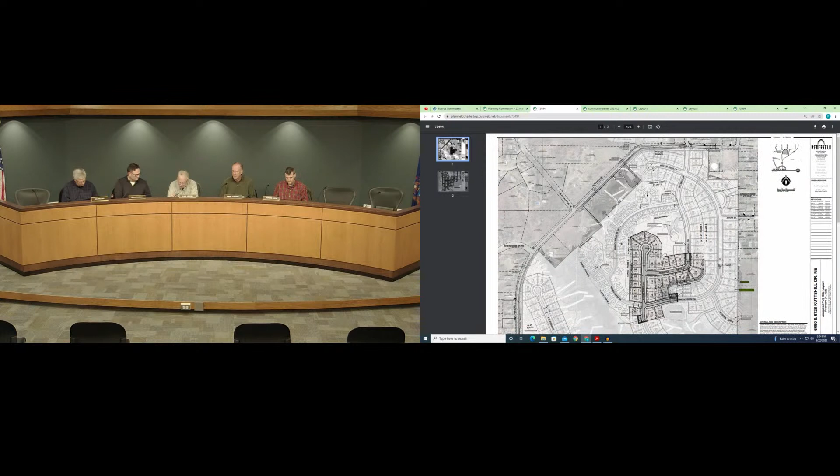Project name: the Ravines at Inwood, Phase 4 PUD, Phase 3 plat. Applicant Jeff Clausen on behalf of Kuttshill Development LLC. Project address 6500 Kuttshill Drive Northeast. Permanent parcel number 41 10 14 276 003. Size of site, entire PUD 93 acres, Plat Phase 3 is 13 acres. Zoning: PUD, planned unit development. Description and action requested of the Planning Commission: to hold a public hearing and consider a recommendation to the Township Board for tentative preliminary plat approval for the Ravines at Inwood PUD Phase 4, Plat Phase 3.

All right, is the applicant here? If you would come forward to the podium, give us your name and the details on the project, please. I'm Rob Behrens with Nederveld, and I'm here with Jeff Clausen on behalf of Kuttshill Development. We're here tonight seeking tentative preliminary plat approval for Inwood Ravines Phase 3. It's the fourth plat within the development.

As you can see, Phases 1 and 2 of the plat - we developed this as Phase 3 of the plat, but because there's a separation between this development and that plat line, they're not adjacent or contiguous. We had to rename this; it's called Inwood, the Ravines at Inwood South. So it is the third phase, but it's not contiguous to Phases 1 and 2 of the Ravines at Inwood. It's a technicality based on the Plat Act, but this is the fourth phase, which is important for a later comment.

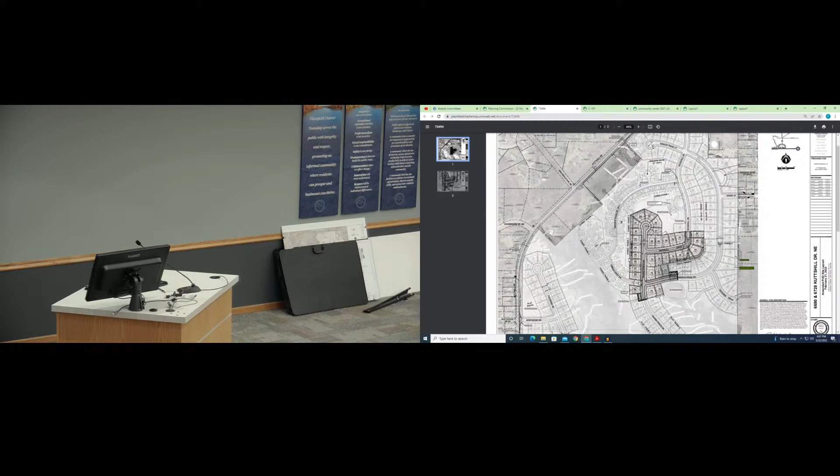So we fulfilled that obligation. The PUD also required that, contiguous with Phase 4 of the plat, we would build the pavilion area. That is located here — that is the plan, that is what has been proposed, and we can flip to that at the end; there's a rendering of the pavilion and the amenities and playground and things, so we are planning on doing that.

The third thing required is southbound Kuttshill at Rogue River, some right turn improvements. We were prepared to do that and did some topo work. Evidently there have been some discussions between the road commission and the township, and maybe even MDOT or soon to be MDOT, about how to make that intersection work better than it does. So we did an estimate, and the township engineer reviewed it.

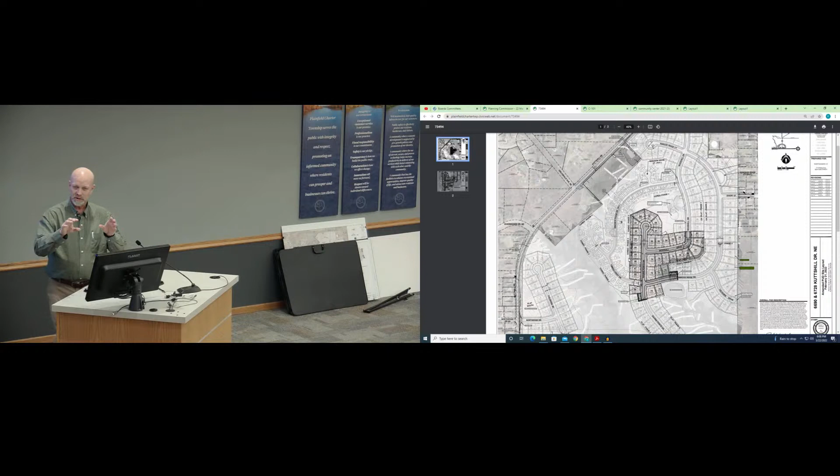Pete and his group reviewed it, and the road commission reviewed it. We agreed on a number, including 25% for engineering and contingencies, and the developers have agreed to write that check to the road commission to be held in escrow. They're going to use that when they come up with a design, along with some public funds, to redo it and take on that construction. But we agreed to take our funds and deposit them to be used for a bit bigger, better, more thorough project than just the right turn headed to the south. So that's it in a nutshell. Jeff and I are here to answer any questions you may have.

I think we'll start with staff comments first. Elizabeth, is this you? Yeah, this is me, and Pete has been working on this too. I think the applicant did a great job of giving an overview.

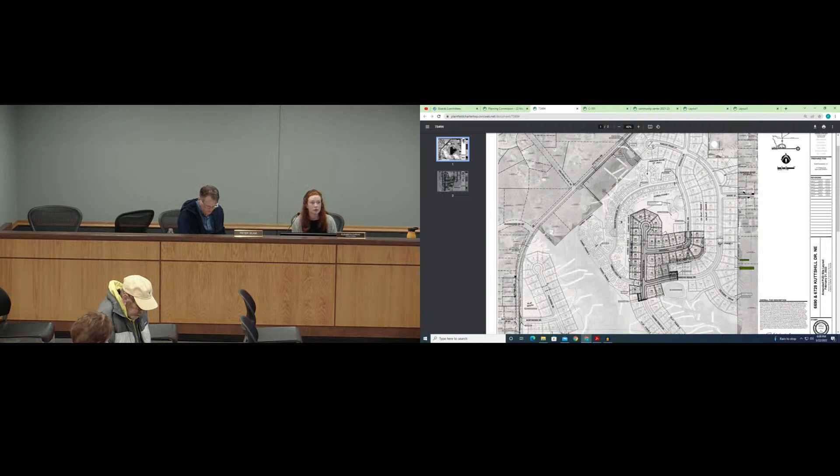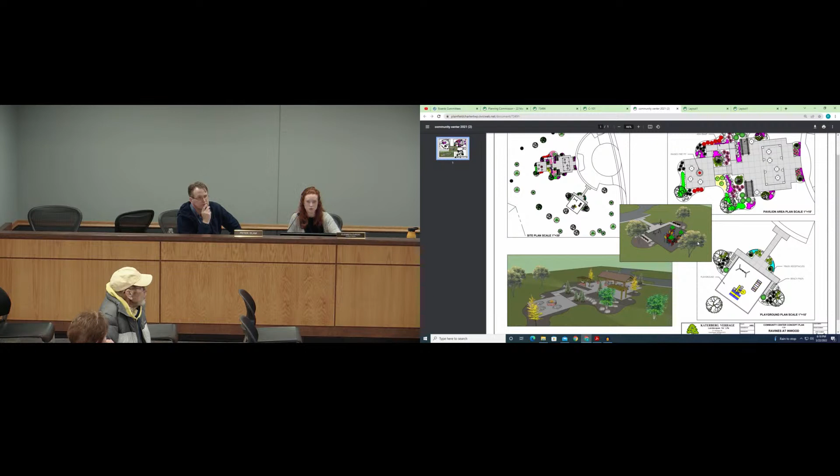This is technically the PUD's fourth phase, which does trigger all of these improvements that need to be made. Here's the community center renderings the applicant was referring to. They are required to do this as part of this plat. We've worked out sidewalks and all of the infrastructure that needs to go in. The proposed lots do meet the requirements of the PUD, which is the purpose of the tentative preliminary plat, to make sure the lots they're proposing meet either the zoning ordinance or the PUD regulations, which these do. The amount in escrow for those intersection improvements was approved by the road commission and staff, so we're comfortable recommending preliminary plat approval at this time.

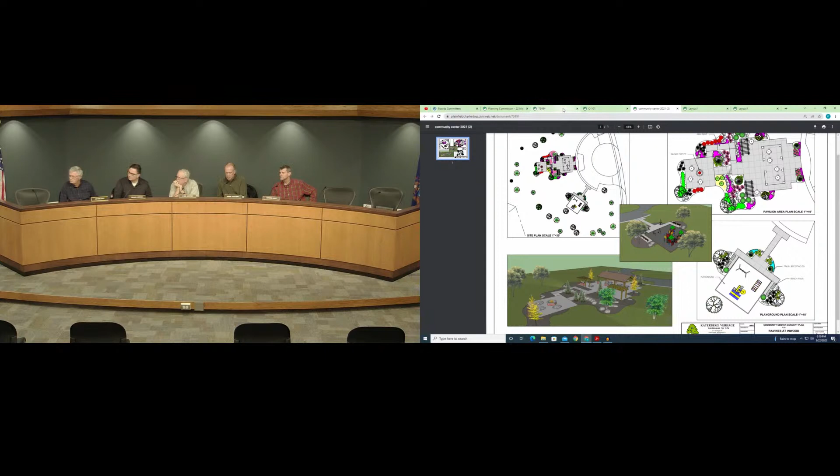Pete, do you want to add anything? Just a little background: the road commission is looking at an alternative Michigan-type turnaround down at that intersection. They're investigating what will and won't work right now. We wouldn't expect that to happen this year, but perhaps next year if it does. So this is a little more background on that part of it.

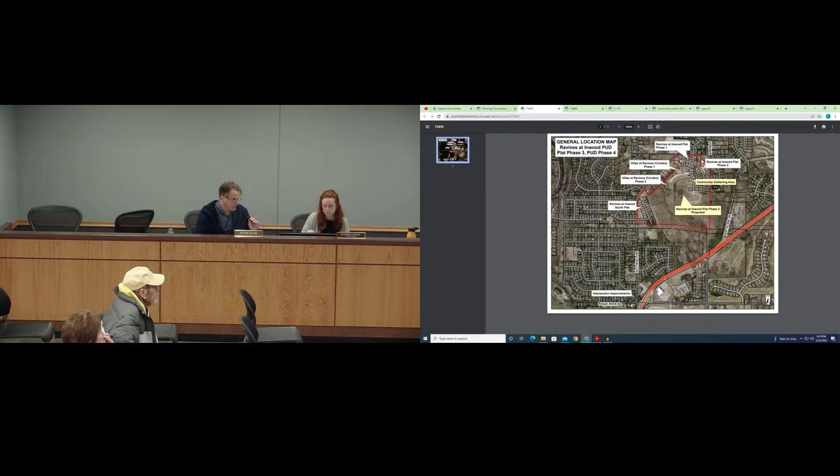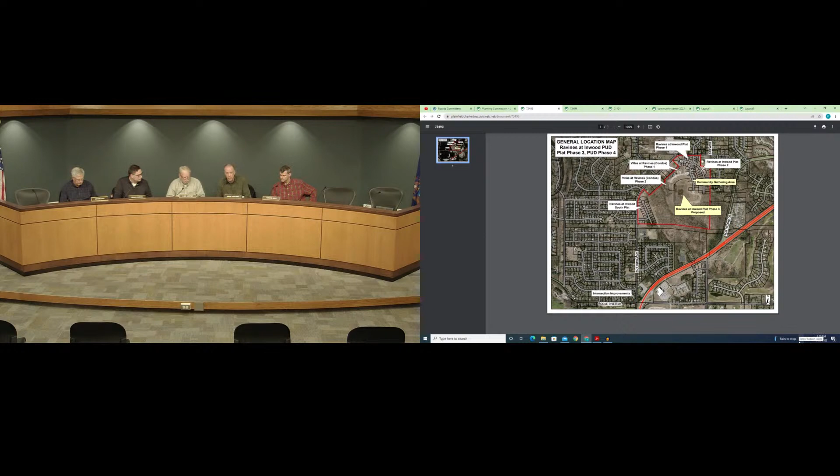Staff-wise? Okay, we'll open this agenda item up for public comment. If there's anybody wishing to make comment, raise your hand and we'll invite you up to the podium. Sir, if you'd like to come up to the podium, state your name and address first.

I can't remember the address. My name is William Sneller, I'm president of the Council of Plainfield Christian Reformed Church. I think the address is 6350 Kuttshill Drive. We're the church property adjoining. My only question is, you pointed out there's a retention pond — where does the water go from that retention pond? It goes south to M37, in front of... what's that gentleman's name? And then there's a church there.

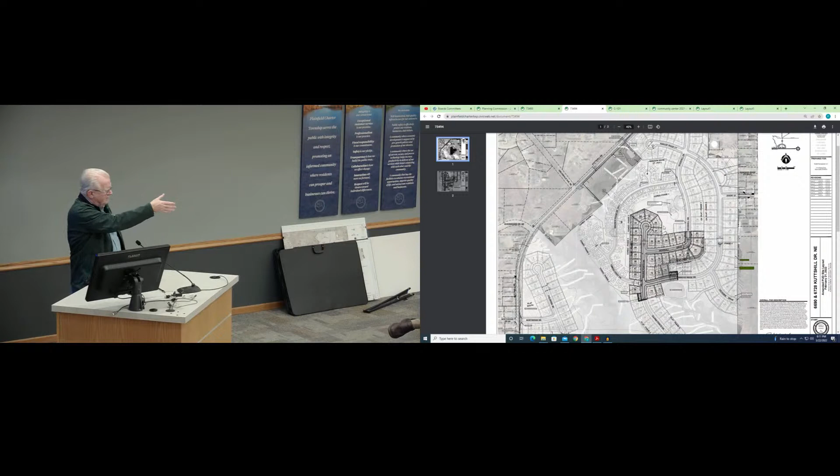So that water doesn't go toward Northland Drive? No, correct, it goes to Northland Drive, comes out by the old Victory Baptist Church. All right, I just wanted to make sure it wasn't complicating anything more than what we're already having going on with water.

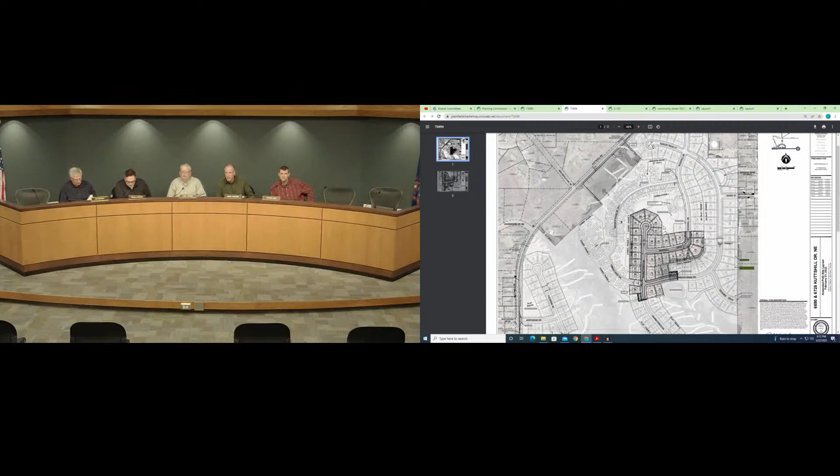Any additional public comment? Anybody else wishing to make a statement? Raise your hand. Seeing nobody, I will close the public comment portion, and we'll see what questions the commissioners have.

Jim, we'll start down on your end. I have nothing here, thank you. Dennis? I have nothing at this time, no. Carl? No, I have no comments. Peter and Elizabeth covered the questions. My question was, do we have any time frame that the road commission has for the improvements on Kuttshill? And the answer is nope. So it sounds like next year. So I'm all set. Thank you, Brian.

Okay, my only question is the cost of the road — that preliminary amount being put in escrow — what if that's way off by the time they get around to doing this, or something drastically different has to be done? Well, the amount of money they're contributing is only a percentage of what will have to be spent. But if it does come in higher, they're done — it's going to be a commitment by the township and the road commission to make these improvements. Essentially, with the money we're getting from, I guess it's Biden bucks, I can't remember the exact term, that's one of the anticipated projects we might be able to make happen now.

So that's not a concern with budgetary. Well, it certainly is, but the fallback is if all else fails and the road commission design isn't going to happen, then we can come back and still put the right turn lane in there, which this covers. Okay, and that's what that money is held in.

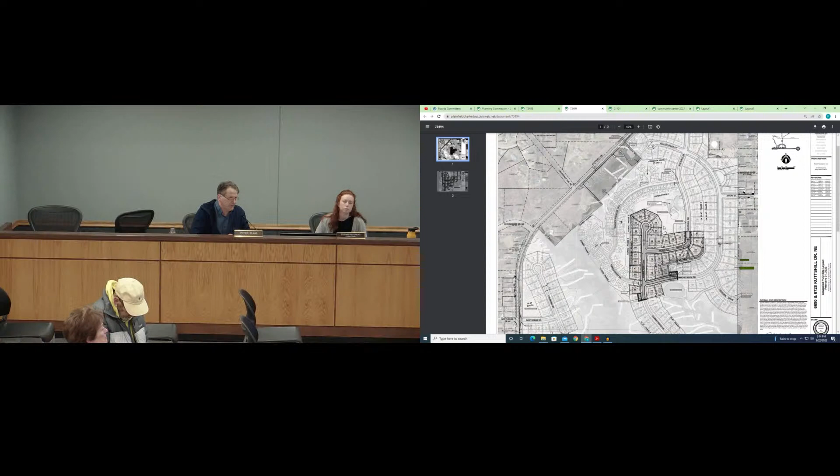Hoping to find a better solution, maybe? The right turn lane is a nice thing, but ultimately does not solve the problem there. The problem is left turns onto Wolverine Boulevard and Rogue River there.

I think that's all the questions I have. If everybody is good, I'll take a motion at this time. If somebody would like to, I'll make the motion.

I move to recommend tentative preliminary plat approval to the Township Board for Ravines at Inwood Plat Phase 3, PUD Phase 4, for 32 platted lots, subject to the following conditions of approval. Number 1, the applicant shall complete the required amenities as outlined in the Ravines at Inwood PUD ordinance to amend, prior to build-out of the Ravines at Inwood Plat Phase 3, PUD Phase 4.

And 2, the applicant shall provide escrow funds to the Kent County Road Commission in the amount equal to the improvements required to the Kuttshill Drive/Rogue River Road intersection, as approved by the township engineer and the Kent County Road Commission. We have a second.

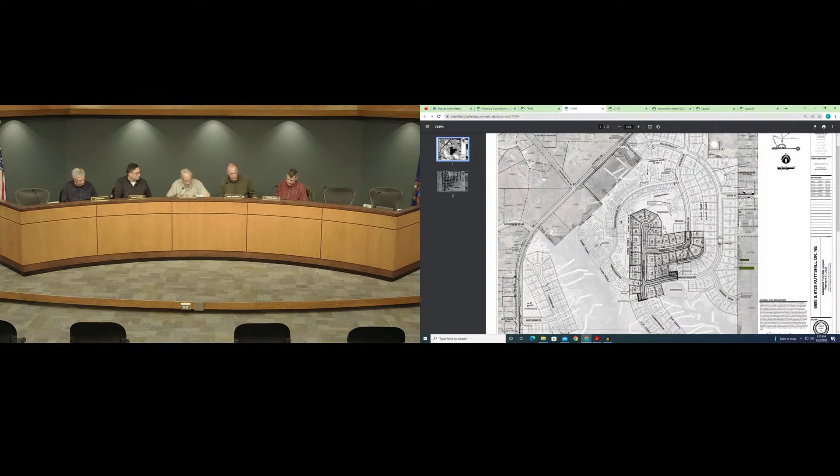Support. All those in favor, say aye. Aye. All those opposed, same sign. Passes. Thank you very much.

Our next agenda item is the Valley expansion. Carl, would you like to read that applicant information, please?

Project name, the Valley Rezone and PUD Expansion. I think I'm reading the right one, yes. Applicant, Zed Posak, on behalf of TEG Valley LLC. Project address, 4248 and 4325 Pine Forest Drive Northeast, 4209 and 4243 East Beltline Avenue, and 3110 5 Mile Road.

Permanent parcel number 41-10-34-226-045, 41-10-34-226-042, 41-10-34-226-046, 41-10-34-226-009, and 41-10-34-226-049. Size of site, entire PUD 34.09 acres, development area 0.51 acres, zoning PUD planned unit development.

Project description and action request: the Planning Commission to hold a public hearing to consider an amendment to expand the Valley planned unit development by rezoning approximately 0.51 acres at 4243 East Beltline Avenue and a small portion of 4248 Pine Forest Drive from O office to PUD, to demolish an existing home and allow for a 3,200 square foot 6-unit apartment building in the same location.

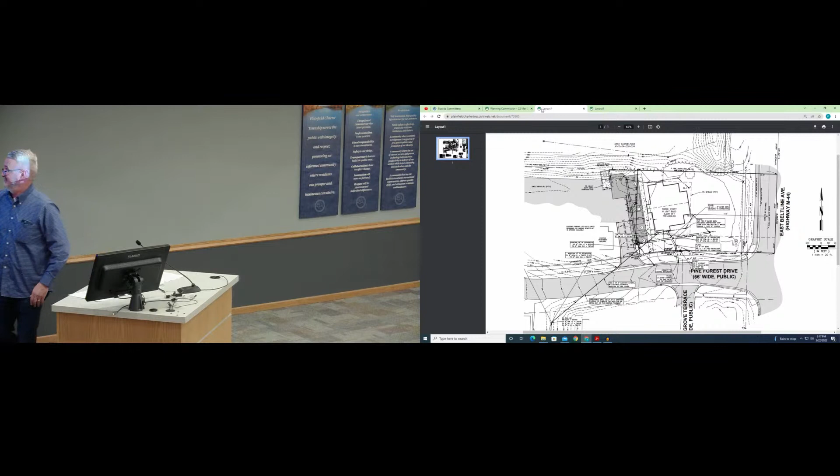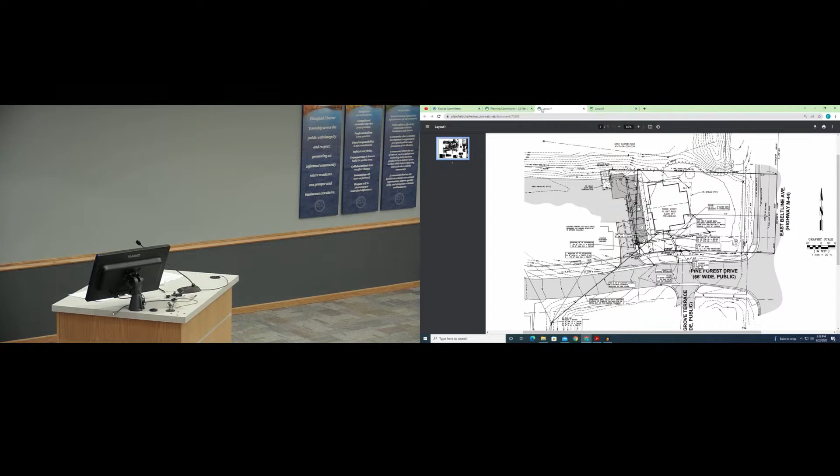Stormwater management's all being handled on site. It'll discharge to the existing storm sewer on Pine Forest Drive. Water and sewer utilities are all available adjacent to the site. That's about all I have. It's a fairly simple project. It's kind of wrapped up into the PUD amendment, which is a much larger project, but the actual proposal is fairly small area.

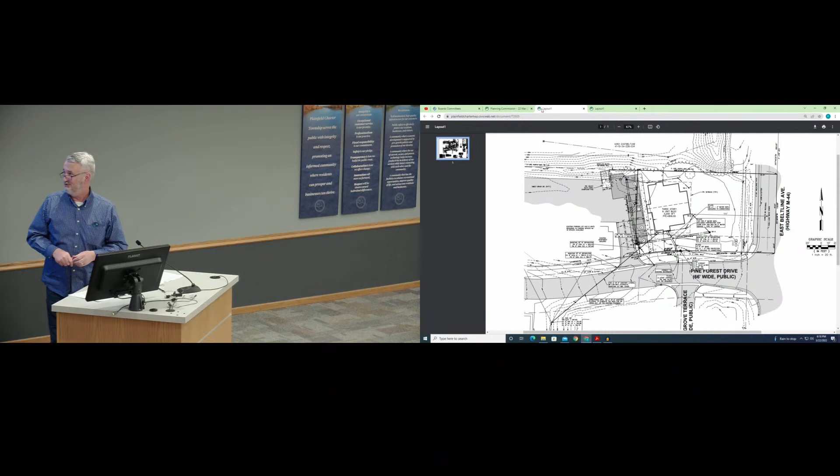Staff, is this Peter? Yep, is this you? Okay. So what you have, and I'll just go through a brief bit of the history first—they came in a couple years ago to rezone this existing single-family home into office, and a portion of their property that was part of the existing apartment complex. That project, that plan fell through, and then they were essentially a non-conforming house.

And they came back to see what they could do with the property, and we said, well, you can't reuse it as a house—you have the office option, or you can tear it down. Staff suggested they could pursue an office or apartment building utilizing some of the existing infrastructure there, but did urge them to be as far away from East Beltline Avenue as possible to meet the intent of the overlay district and generally meet the characteristics of the area.

Subsequently, as we reviewed the PUD, we noted it had not been completely updated, because when they came in for the improvements in 2017 for the overall development, we didn't have to go through the process we have now. So we're also expanding the PUD in a way, so we have to clean up all the language that's in the existing PUD.

So it's a twofold action: one, rezoning the property from office to PUD, potentially, as well as amending the PUD. We wrapped it all into one motion here for you, if you're willing to recommend it to the Township Board. There is one condition of approval. I do have most of the material, but staff-wise we are looking for a consolidated map of the entire PUD as it is today, so we can put it in our book as a reference.

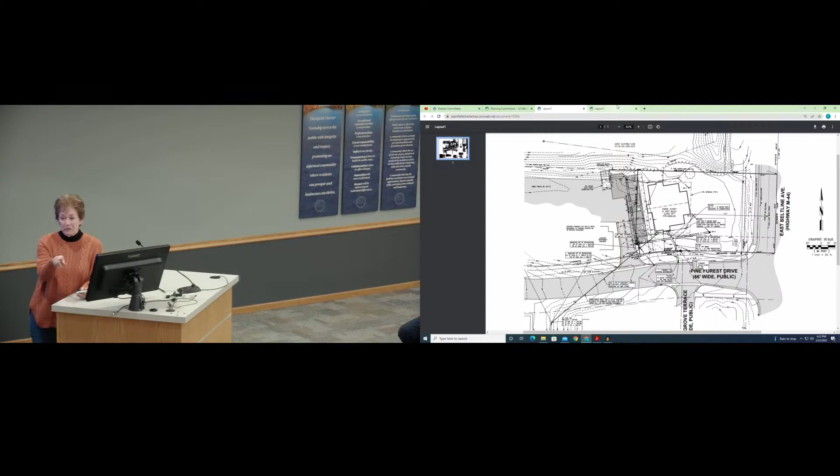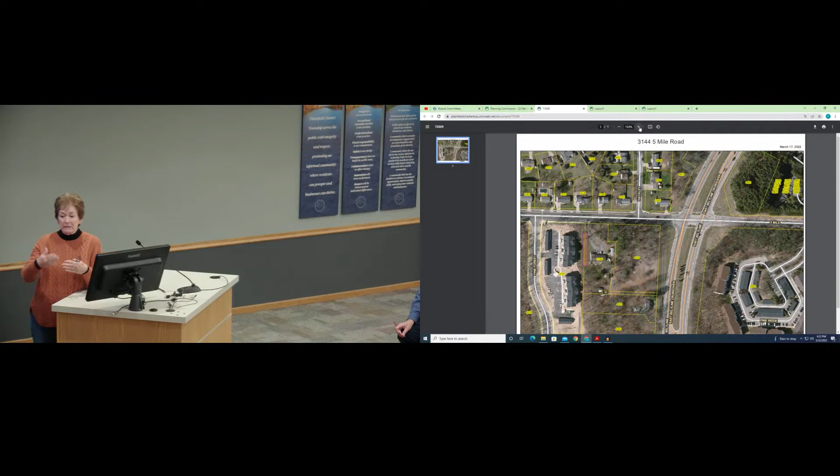The apartments were developed west of our house on 5 Mile and the road that goes into Hidden Valley, or whatever it's called. We've been looking at dead trees for 2 years now. No irrigation has ever happened. Trees were replaced once, not taken care of, so they died. And we've been asking the township how do we get this resolved? I would like something to happen. I know it's minor to this whole development, but we have to look at the mess. We'd like some kind of leverage, I guess, in the approval, not going through until they at least give a plan and a time when this is going to be resolved.

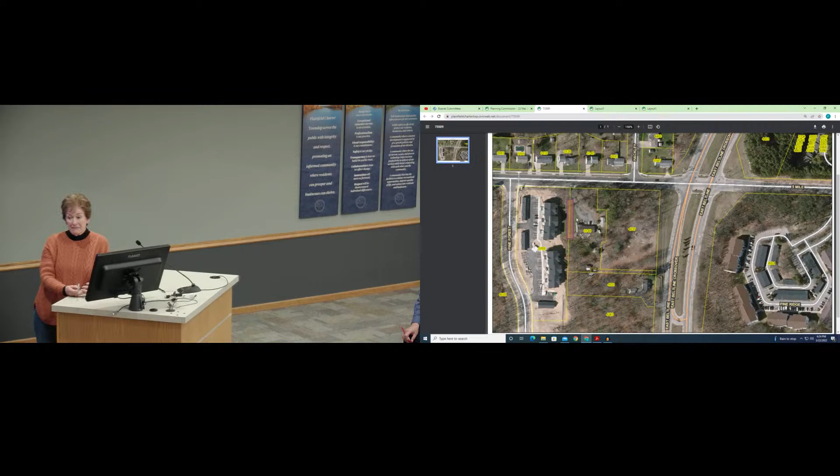Now, I talked to Peter, and he said it won't be a chain link fence, it'll be a fence of some kind. I'd like to know what kind of fence, and where it'll be placed, because we've planted a lot of trees and bushes in that area in the past year or two. So if we have to move them, we need to know in advance. But we'd like some kind of timeline as to when this will be taken care of. I really don't want to look at this. I can't believe the renters like looking at it, but it concerns my husband and I.

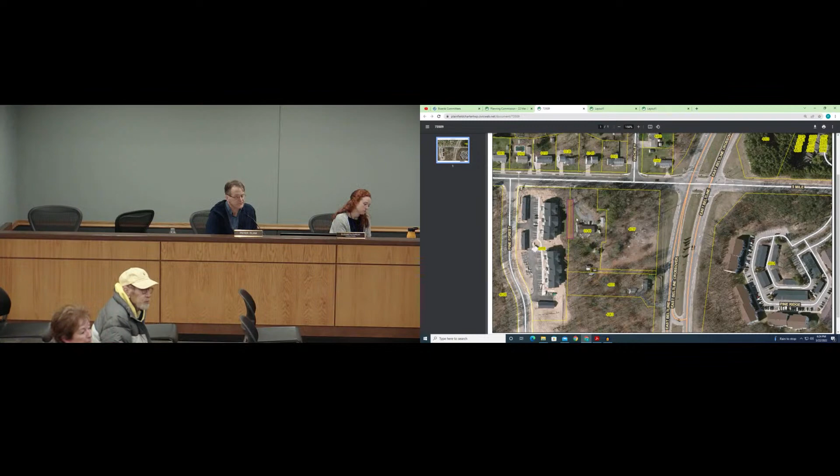Staff already weighed in? Yes, we have been in discussion with the Kazans quite a bit over the years. The applicant, when they built the building, took down the existing vegetation, and they were required to replace it with evergreens. They did not irrigate those evergreens, and the 2 or 3 attempts that they have done over the years have all died.

Therefore, we're at a fence, though I did write the condition in there under site plan approval, which is where it should be addressed. We did put a condition in there that they may be able to put evergreens in there if they can irrigate that. I think that'd be more acceptable to most people. Otherwise, they're going to have to put a solid wall, probably a vinyl fence in there, and we did add in that condition that it had to be done by June 30th of this summer.

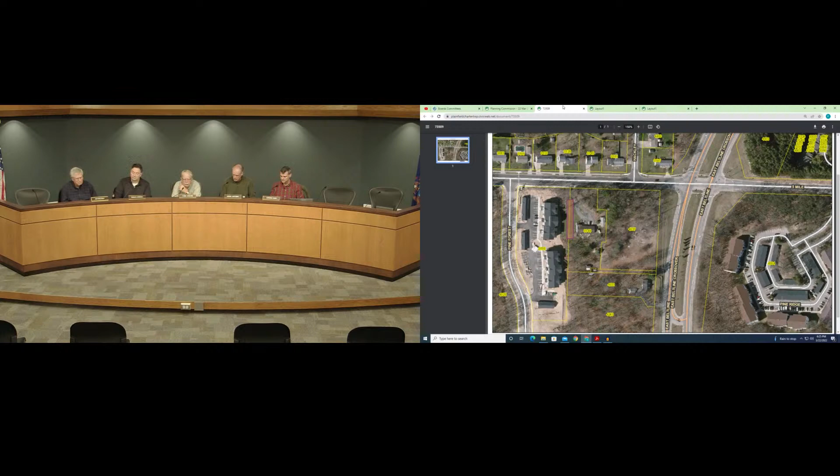We'll start down on this end this time. As far as it pertains to the rezoning for the corner lot at 4243, I don't have any questions except a clarification. Paul, you mentioned it's a 2-story building, or does the plan say 3-story? Two units on each story. Thank you, that is all.

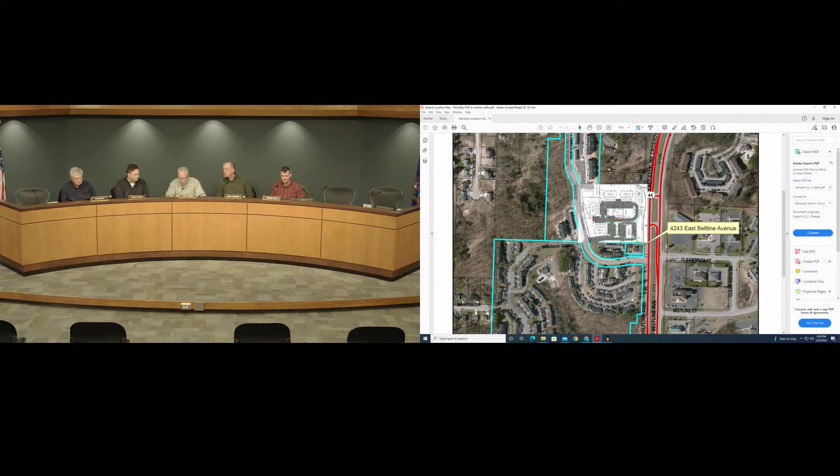Carl, I have a question, and maybe I'm not thinking correctly. We approved a development. Yeah, that one there, is that part of this? There are 2 independent apartment developments. Okay, so what's being built there today is totally separate from what this is. So this request is for the house that adjoins all of the property to the south. And yeah, it doesn't belong to this, it belongs to all this. Yep, okay, that was my clarification. I was thinking it belonged to the other one, so at this point that's all I have.

Dennis? I don't have a comment at this time. It makes sense to me that for rezoning to be, square up that lot, and so.

Jim? Fine, nothing here, thanks.

I just had one quick question myself. There are no additional exits to East Beltline, no changes there, nothing the state needs to address. The existing driveway will be closed, which is one of our objectives here, and they will be using Sweetbriar, which is essentially the parking lot entrance to the apartment to the west. Okay, so nothing changes on the belt. Actually, we reduced the exit, correct, onto the belt in the driveway. Okay. That is all the questions I have.

With no additional questions, I'll take them. Oh, Carl, one more question. Peter? Sure. Can we do anything, or can we make a condition for plantings or irrigation of plantings, or is that going to be strictly left up to staff?

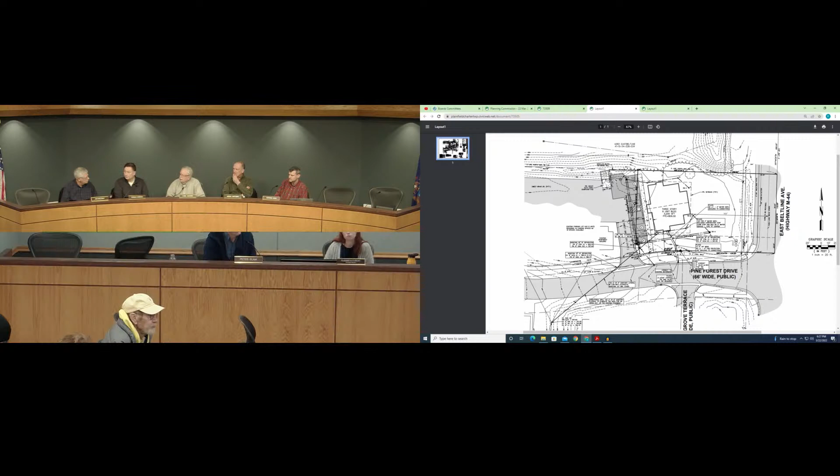You certainly are within your rights to make a condition or modify the condition if you wish on that. I don't know if Paul's in the position where he is assured that the applicant would agree to sprinkle that, but it's an option. Well, I guess from the comments, under site plan, we separated that to deal with under site plan. That, on the site plan? Yeah, yes. Okay, okay, then I'll entertain a motion at this time.

Okay, I'll move that the planning commission recommend the township board approve the ordinance to amend and rezone 4243 East Beltline Avenue and a small portion of 4248 Pine Forest Drive from O Office to PUD, to permit the expansion of the Valley PUD development, based on the findings and information provided in the staff report, subject to the following condition of approval: 1, the applicant shall provide the Community Development Department an updated development plan drawing for all the properties within the Valley PUD. We have a second?

Support. All right, all those in favor, say aye. Aye. All those opposed, same sign. We are passed on that particular agenda item.

We'll move on to the next one, which also involves the valley. So, Carl, if you'd like to read that one.

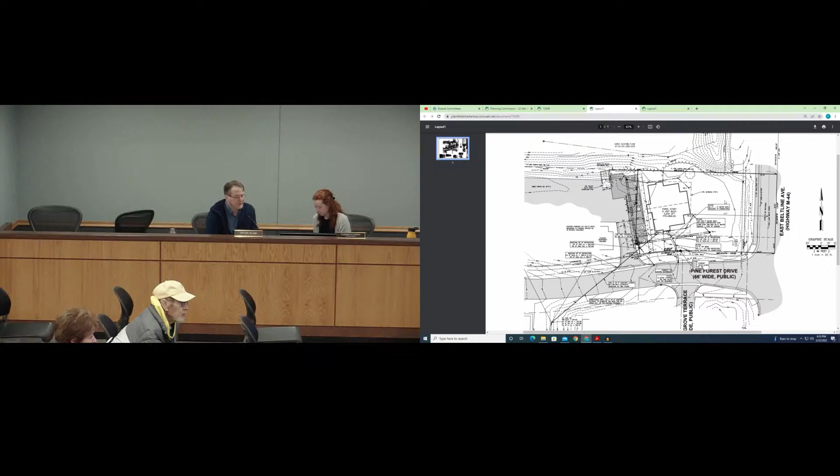Is there a time frame? The applicant is committed in writing to do it this spring. We gave them a June 30th deadline, just in case it's a wet season, that type of thing, but they need to have it done sooner rather than later.

Mr. Chairman, could I ask for clarification from Pete, if I may? Yes. On the dumpster, Pete - which property line, what direction do you see that going? The initial plan had it right on the line, and we're looking to get a little bit of separation - I think I said 3 feet at least from the property line. Okay, all right, thank you. We can do that.

I will entertain a motion at this time. I move the Planning Commission grant site plan approval to construct a 3,200 square foot, 6-unit apartment building at 4243 East Beltline Avenue and part of 4248 Pine Forest Drive, subject to the following conditions.

Number one, the applicant shall revise the site plan to show a sidewalk along East Beltline Avenue frontage. Number two, the applicant shall provide a photometric plan for approval by the Community Development Department prior to submittal of a building permit. Three, the applicant shall install a solid fence or irrigated landscaping buffer between the northernmost apartment building at 3110 5 Mile Road and 3144 5 Mile Road by June 30, 2022, to be approved by the Community Development Department.

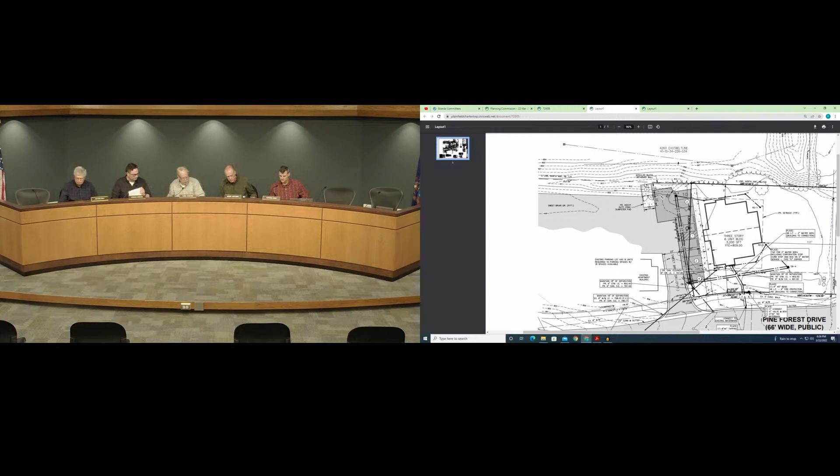Now we are on to appointments, Parks and Recreation Committee. Who's handling this? We need 2 representatives from the Planning Commission. They can be the same person or different people, for representation on the Parks and Rec Committee and the Zoning Board of Appeals. Right now, Carl is serving as both of those representatives, but whoever wants to do it for 2022 is welcome. We just need a motion for both of them.

Carl, what is your take? I'll stay if nobody else wants it. Do you want to do both? I've been doing both for some time. ZBA meets maybe 2-3 times a year. I'm familiar with the ZBA since I came from that route also, so I'd be happy to do that if you wanted to step back. I definitely want to just stay on Parks and Rec. I've been involved in that one since we started with the Trail Committee, so I'd really like to stay on that one, but if someone wishes the ZBA, I'm more than fine with that.